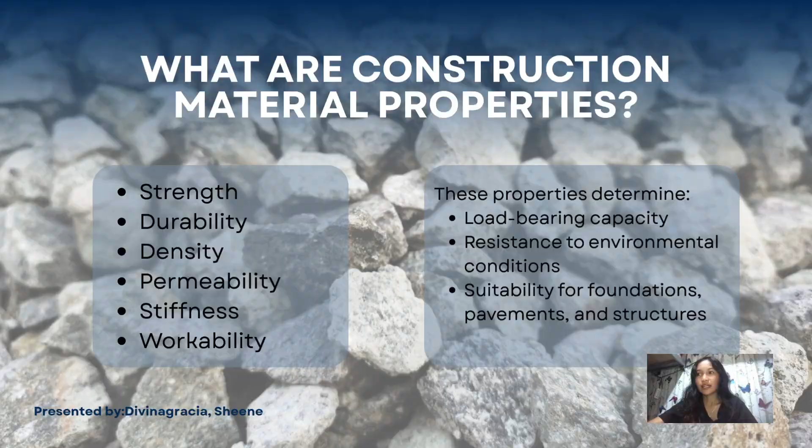And next, let's talk about the types of construction aggregates.

Next we have the concrete aggregates. This includes the sand, gravel, or crushed stone, and their primary job is to be a filler in our concrete, as it also helps with the compressive strength of our concrete.

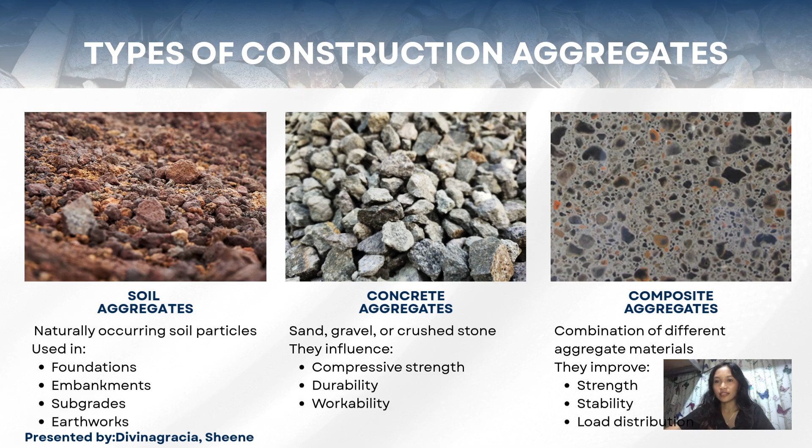And lastly, we have composite aggregates. As the name suggests, these are a combination of different aggregate materials. It's like a custom blend. They do this to improve the overall strength and stability of the mix, and to ensure better load distribution.

Next, where do our aggregates come from? First, there are three main types of rocks. Geologists call them igneous rocks, sedimentary rocks, and metamorphic rocks. Igneous rocks form from cooled and solidified magma or lava. Because of this, igneous rocks are often very hard, strong, and durable, making them excellent for crushed stone aggregates.

Next, we have sedimentary rocks. These are formed from deposited sediments over time. Examples are sandstone, shale, and limestone. These rocks can sometimes be layered or bedded, which can affect their strength.

And lastly, we have the metamorphic rocks. These form when existing rocks - igneous rocks and sedimentary rocks - are put under intense heat or pressure. For example, limestone, when put under heat and pressure, becomes a beautiful crystalline marble. So the first step is to understand the aggregates' properties so we can understand the next topics.

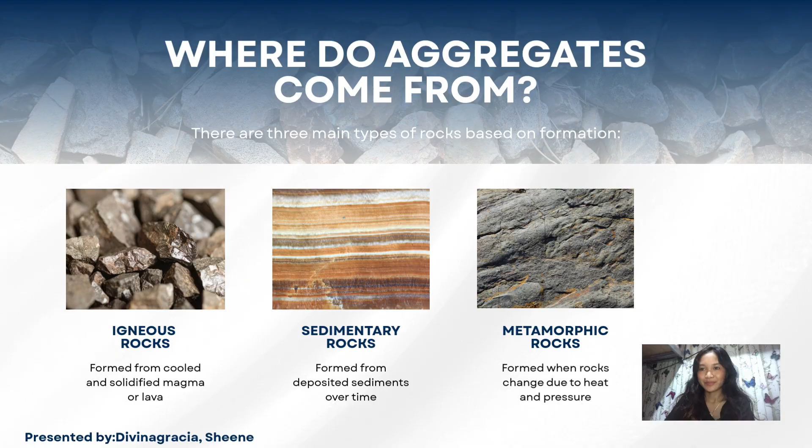Hello everyone. So now let's talk about soil. By definition, soil is a loose mixture of organic and inorganic materials. The organic part comes from decomposed microorganisms and plant debris, while the inorganic part consists of rocks and minerals that have been broken down by weathering and other natural processes.

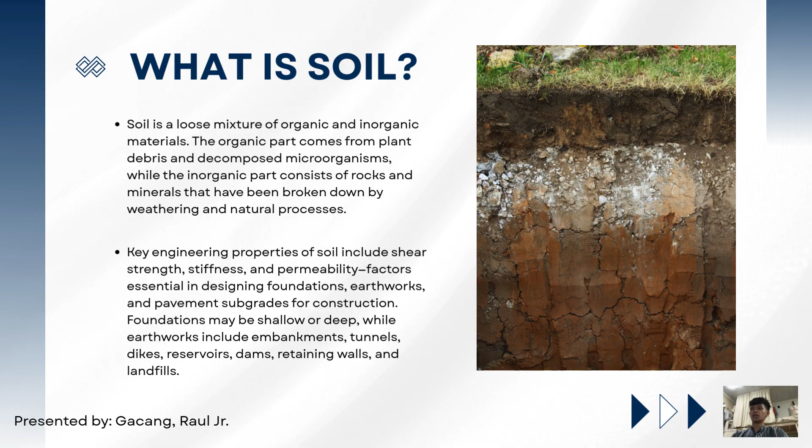Nakadepende siya sa stiffness, permeability, and sa iyang shear strength, whether shallow siya nga foundation or deep foundation. So, unsa man gid ang naa sa isa ka soil or soil sample?

So, first is the solid phase, which is ang soil particle mismo or the soil itself. Mao ni siya ang mineral or rock fragments that form the framework of the soil, and diri gikan ang strength and structure sa soil. Second is the liquid phase.

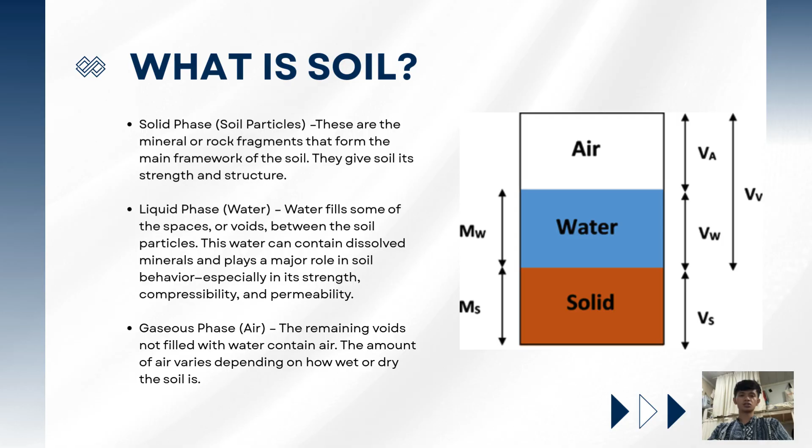So the third one is the gaseous phase or ang air, which is also known as voids. Mao ni siya ang gaps mismo sa soil particles. Nagadepende ang amount sa gas sa water content sa soil. So kung mas dry ang soil, mas daghan siya gas or voids.

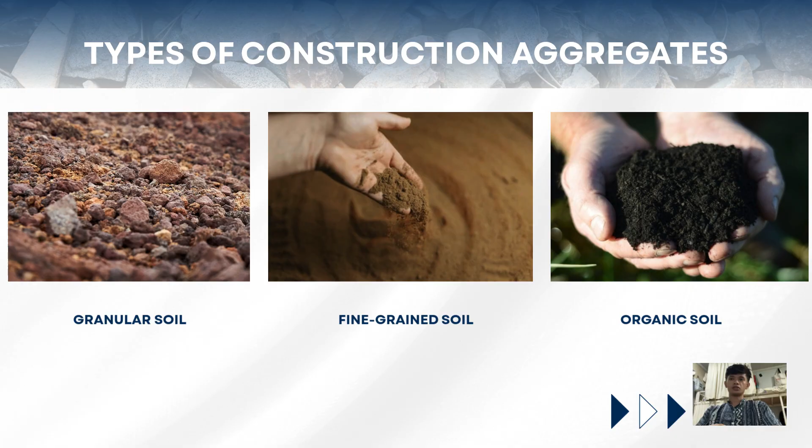So there are three types of aggregates. First is the coarse aggregates or ang granular soil. Next is the fine grain soil, and third is the organic soil. First is the granular soil. Under ASTM D2487, ang granular soil is ang soil na more than 50% ang ma-retain sa sieve number 200. Meaning, dagko ang iyang size na mao ni ang reason nganong di siya makalapas sa sieve number 200.

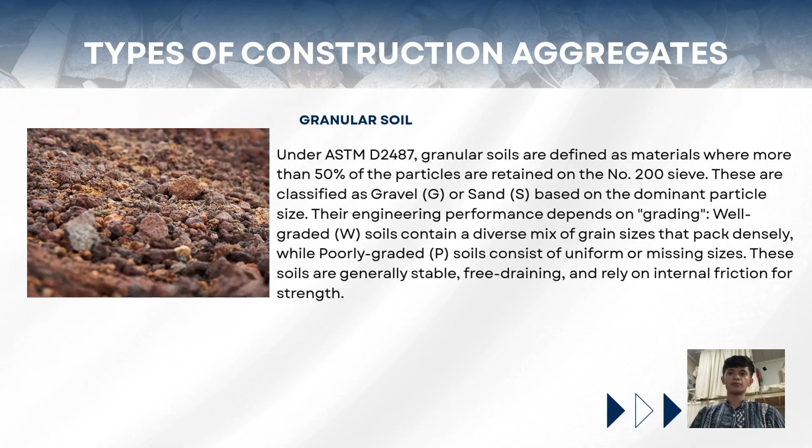So, ginaklasify ni siya ang granular soil aggregate into two categories, which are gravel and sand, based on the dominant particle size. Second is the fine aggregate or the fine grain soil. Mao ni siya ang soil particles na more than 50% ang mupas through number 200 sieve. It is categorized as silt and clay. ASTM distinguishes them using Atterberg limit to determine plasticity, which is very important and we are very much familiar with since nag-take ta og soil mechanics last semester.

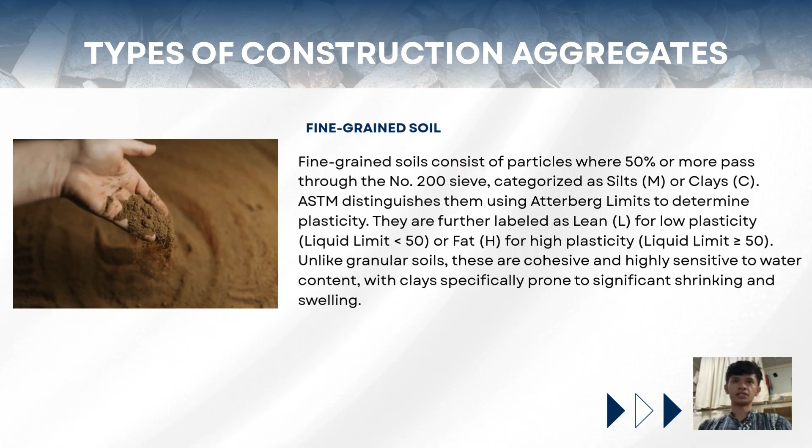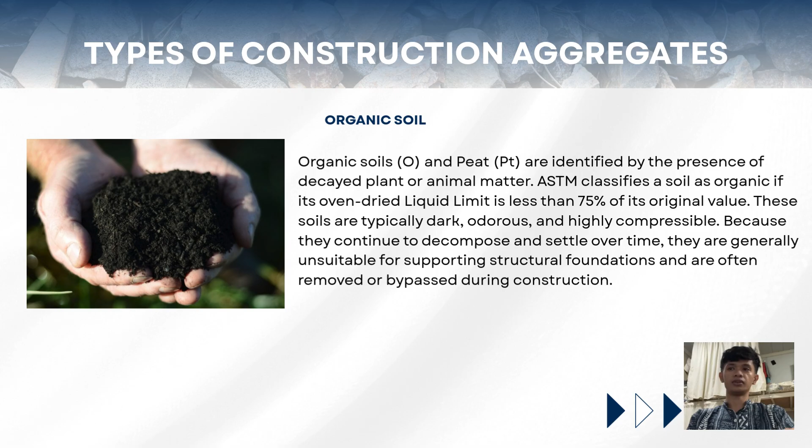Last is the organic soil. From the name itself, it is a soil identified by the presence of decayed plants or animal matter. ASTM classifies a soil as organic material if its oven-dried liquid limit is less than 75%. Most organic material is typically dark and has odor, and is highly compressible, which is not ideal para buhatan og foundation or project above it kay dili niya makaya og support ang isa ka structure.

So let's talk about the engineering properties. First is the granular soil or the coarse grain soil. It is high in shear strength, which is derived from internal friction and particle interlocking. High permeability, low compressibility, and non-cohesive, meaning it does not stick together. It is prone to erosion or collapse in vertical cuts.

Next is the fine grain soils. Low permeability, high cohesion, meaning particles stick together, allowing for molded shapes and steeper temporary slopes. Consolidation: subject to slow long-term settlement as water is squeezed out over the years. Volume change: high plasticity clay shrinks significantly when dry and swells when wet, risking foundation damage.

Last is the organic soil, which has extreme compressibility, low shear strength, and secondary compression. It continues to settle indefinitely as organic matter decomposes. So meaning dili siya stable. And it has high water content, often holding a massive amount of water relative to its solid weight.

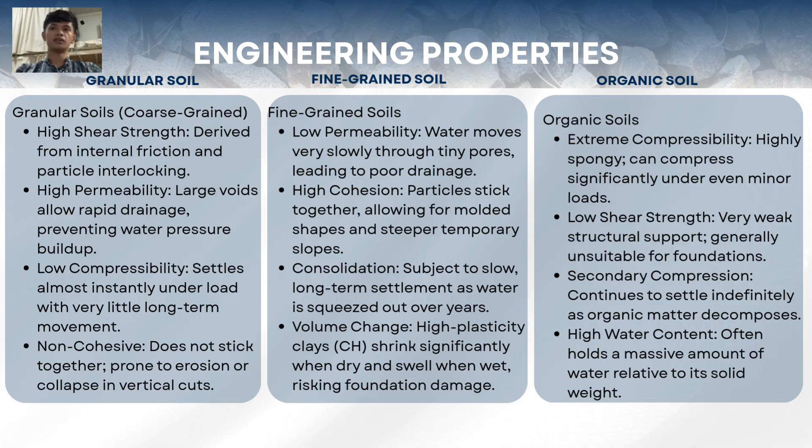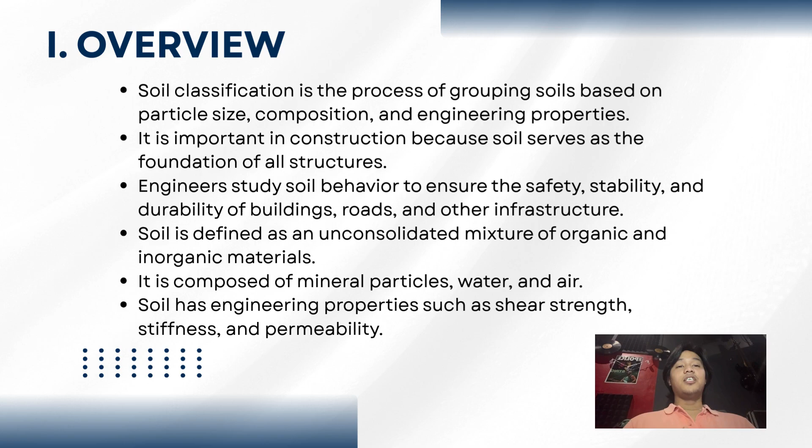Good morning. Mag-proceed ta sa topic sa soil classification. Ang soil classification kay ang process of grouping soils based on size, composition, o engineering properties. Importante siya sa construction. Ang soil serves as the foundation of all structures. Also, engineers study soil behavior to ensure safety and stability.

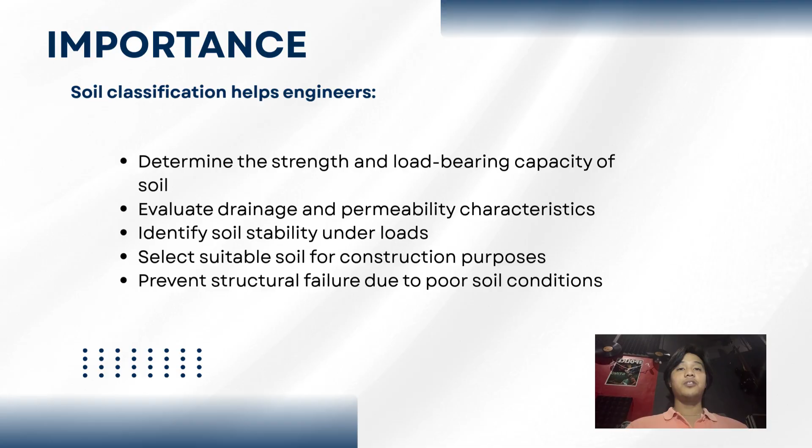Sa soil classification, ang iyang importance kay ma-determine nato ang strength and load-bearing capacity sa soil, ma-evaluate nato ang drainage and permeability characteristics, ma-identify nato ang soil stability under loads, ma-prevent nato ang structural failure due to poor soil conditions. Nganong mag-matter ang particle size? Mag-matter siya sa strength, drainage, ug stability.

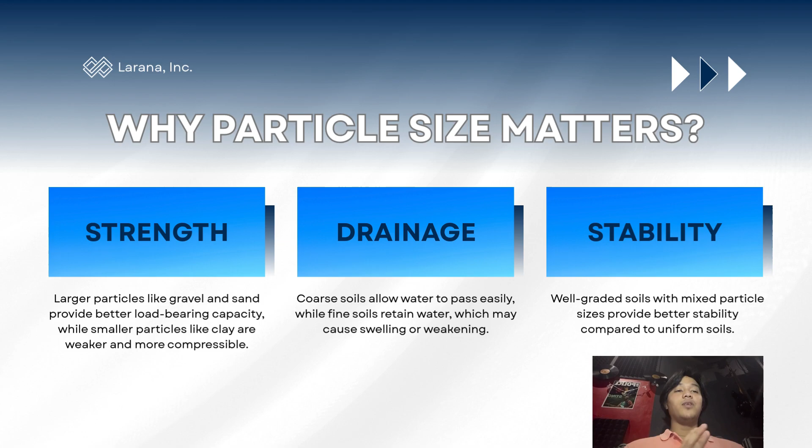Strength: larger particles like gravel and sand provide better load-bearing capacity, while smaller particles like clay are weaker and more compressible. Sa drainage naman, coarse soils allow water to pass easily, while fine soils retain water, which may cause swelling or weakening. Ang clay mag-retain og water. Sa coarse soil naman, dali na siya kay dagko ang voids, so paspas ang travel. Stability: well-graded soils with mixed particle sizes provide better stability compared to uniform soils.

Asa ma-apply ang soil classification? Ma-apply nato siya kay ang soil essential siya sa construction, sa foundation, including both shallow and deep foundations, as it supports the structural load. It is also important in pavements and road constructions, where soil provides the base and affects durability and performance. And in addition, soil plays a key role in embankments and earthworks, which are used to create stable ground elevations.

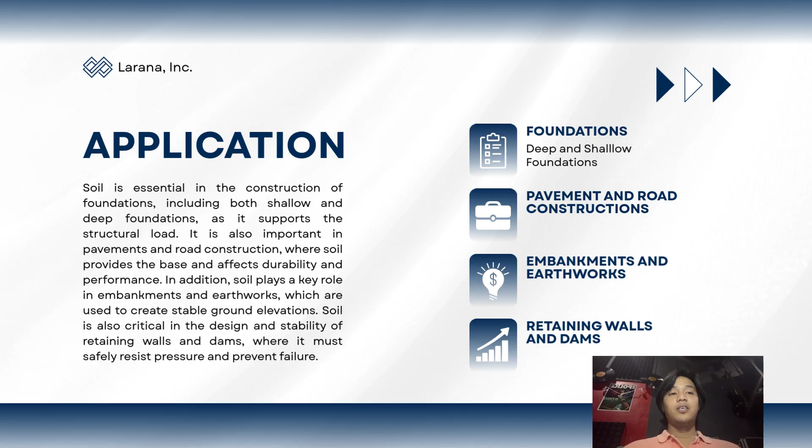Soil is also critical in the design and stability of retaining walls and dams, where it must safely resist pressure and prevent failure. Now, karon ito na application niya sa foundation, sa pavement and road construction, embankments, and earthworks, tapos sa retaining walls and dams.

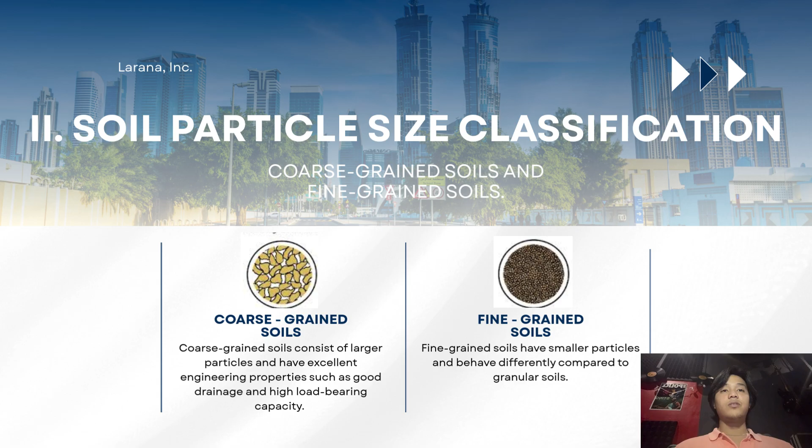Sunod sa soil particle size classification, na-mention naman ganina ang coarse o yung fine grain soils. Ang coarse grain soils consists of larger particles, have excellent engineering properties, such as good drainage and high load-bearing capacity. Sa fine grain soils naman, mga smaller particles and behave differently compared to granular soils. Dapat ta mag-classify kung coarse grain siya or fine grain.

Una, sa coarse grain, sa gravel, particle size niya kay larger than 2 mm, mao ni matawag nga gravel. Also, mga particles pass through 75 mm sieve, ma-retain sa 2 mm sieve. Kabalo na mo sa sieve, kay naagi naman ta sa geotech. Also, ang gravel kay mostly found in riverbeds. Ang iyang properties kay excellent load-bearing capacity, good drainage, low compressibility.

Sa sand naman, ang iyang size kay 0.075 mm to 2 mm. Naa tay duha ka klaseng types of sand, coarse sand ug fine sand. Ang coarse sand, ang iyang particle size kay 0.425 mm to 2 mm. Sa fine sand naman, 0.075 mm to 0.425 mm. Ang iyang properties kay good strength, good drainage, suitable for foundations and pavement layers.

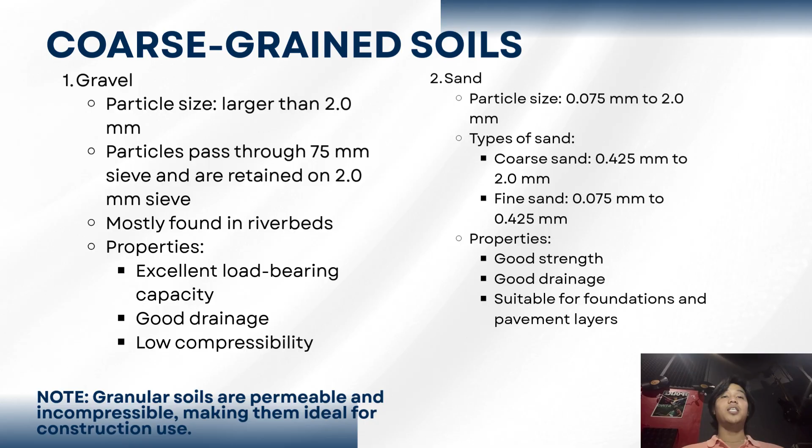Also, note, dili nato kalimtan na ang granular soils are permeable and incompressible, making them ideal for construction use. Timan-i ni. Sa fine grain soils naman, naa ta si silt. Ang iyang size, para matawag na siya nga silt, kay 0.002 mm to 0.075 mm. Mga particles nga dili nato makita sa atong mga mata.

Ang iyang properties: low strength when wet, kay dali ra siya mo-settle. Moderate compressibility, tas poor drainage, kay grabe ka fine, maglisod og agi ang tubig. Sa clay naman, ang iyang size kay less than 0.002 mm. Mao ni atong pinaka very fine particles. Ang iyang properties kay plastic and cohesive, high compressibility, poor drainage, can expand and shrink with moisture changes.

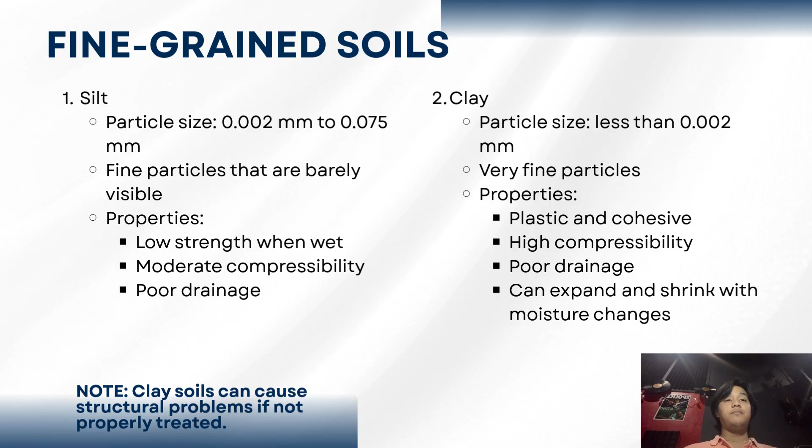Note, clay soils can cause structural problems if not properly treated. Particle size analysis is a laboratory test used to determine the distribution of soil particle sizes. Purpose niya kay ma-determine nato ang particle size distribution, ma-classify nato ang soil according to standard system, identify soil strength and drainage characteristics. Particle size analysis includes sieve analysis and hydrometer tests.

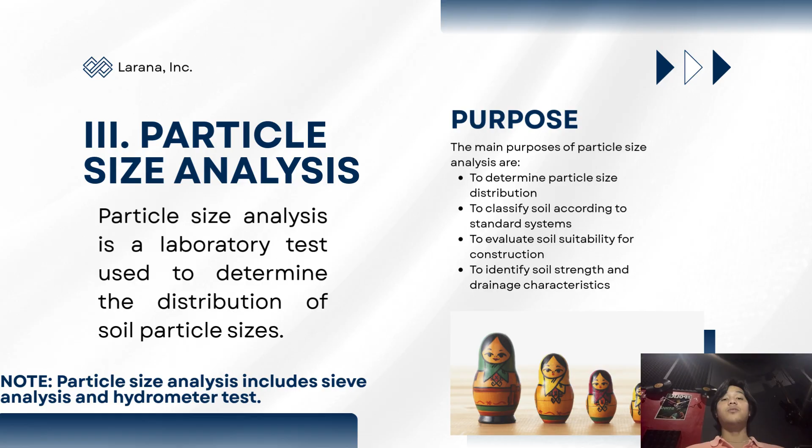Makita nato dito sa table, sieve analysis. Ito yung mga sieve number diri. Sieve number, selected borrow, grading A. The sieve analysis is used to determine the particle size distribution of coarse grain soils, gravel and sand. Importante ang sieve analysis kay sa atong sand, sa atong clay nga grabe kagamay iyang particle size, 0.00 something, lisod na siya sukdon gamit ruler. So mao na ang sieve analysis, diri nato ma-determine kung clay na ba siya.

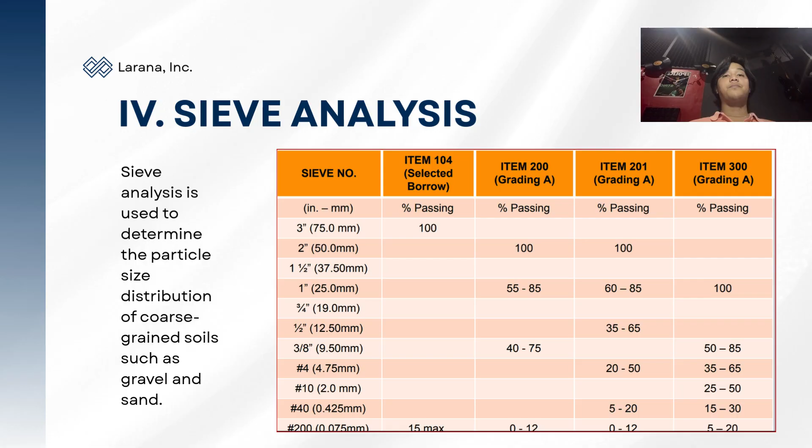So ang table dito sa sieve analysis, usually ginagamit nga sieve kay number 4, number 10, number 40, number 200. Sa atong sieve analysis naa tay procedure. Una buhaton, dry the soil sample. Before ana, syempre magkuha ta og soil sample, mag-soil sampling ta gamit ang soil sampler nga equipment. Tapos i-dry nato ang soil.

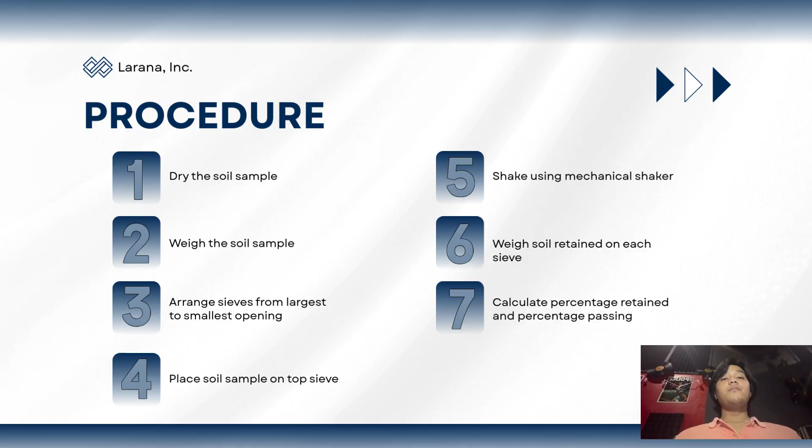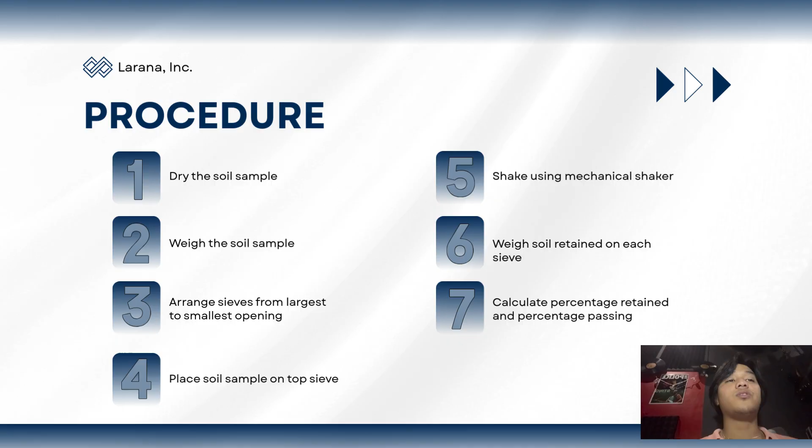I-weigh nato ang soil sample. Then i-arrange nato ang sieve from largest to smallest, ipatong-patong, ang pinakataas kay ang pinakadako. Dayon, i-place nato ang soil sample on top sieve. I-shake nato using mechanical shaker or mano-mano. Sa geotech ninyo, mano-mano ra man to. I-shake nato, ang timer dayon. Sunod nga procedure kay i-weigh nato ang soil retained on each sieve. Ma-calculate nato ang percentage retained and percentage passing.

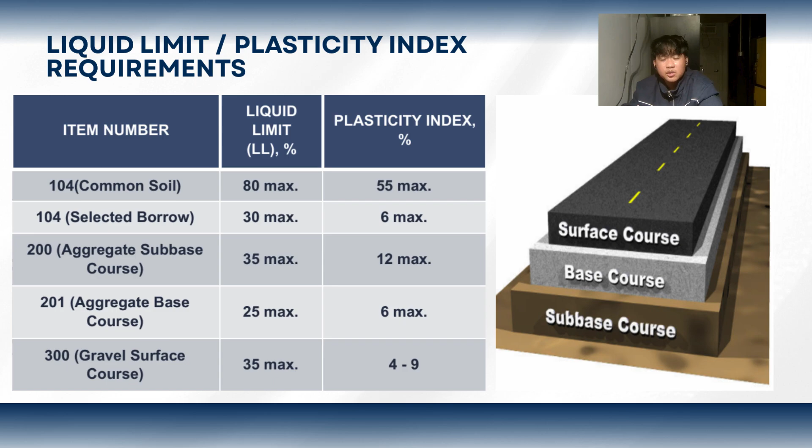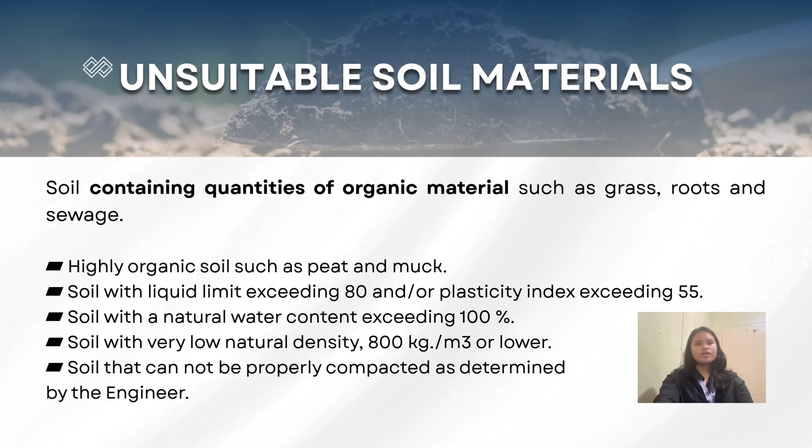So, what are unsuitable soil materials? Unsuitable soil materials are soil containing quantities of organic material such as grass, roots, and sewage. These soil materials are highly organic, such as peat and muck. This soil also has a liquid limit exceeding 80 and/or plasticity index exceeding 55. Also, it has a natural water content exceeding 100% and very low natural density of 800 kilograms per cubic meter or lower. These types of soil cannot properly be compacted as determined by the engineer.

So, the common unsuitable soils include organic soils, peat, highly plastic clays, silts with poor drainage, expansive soils, and loose saturated sands. These unsuitable soil materials also exhibit low shear strength but high compressibility, excessive moisture retention, and poor drainage characteristics. These characteristics may cause settlement, instability, or structural failure.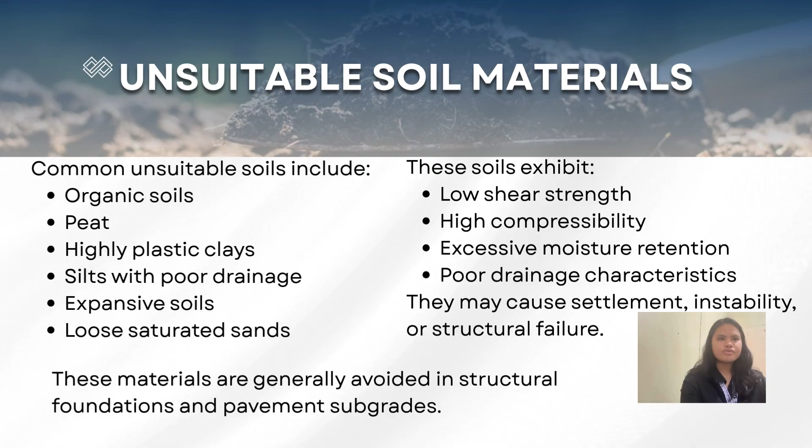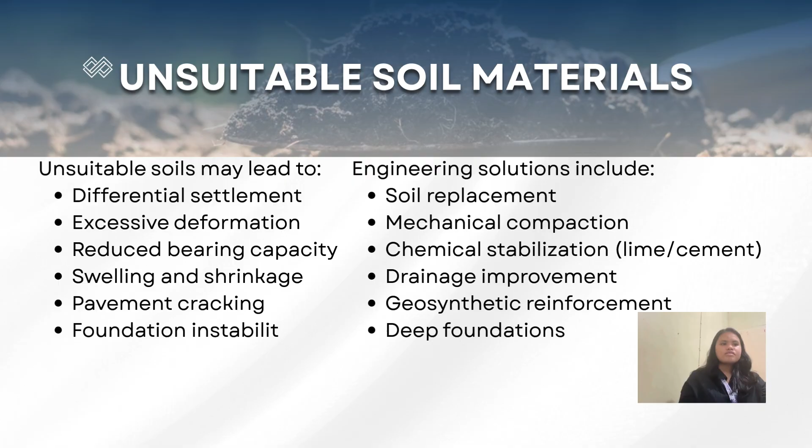These unsuitable soil materials are generally avoided in structural foundations and pavement subgrades for various reasons. Unsuitable soil materials may lead to differential settlement, excessive deformation, reduced bearing capacity, swelling and shrinkage, pavement cracking, and foundation instability. So you could use some engineering solutions to solve these problems, including soil replacement, mechanical compaction, chemical stabilization with lime or cement, drainage improvement, geosynthetic reinforcement, and deep foundations.

So let us now proceed to soil classification using the AASHTO classification system. We have here the table for the AASHTO classification system. We have groups A-1 to A-7 and then A-8 for organic materials. For your group index computation and classification, here is the general guidance. So first, the AASHTO soil classification system has 8 major groups, from A-1 to A-7 with several subgroups, and then organic soils at A-8.

The required tests for these types of soils are sieve analysis and Atterberg limits. The group index is an empirical formula used to further evaluate soils within a group or a subgroup. So we have here A1 to A3 are granular soils, which have percent passing the sieve number 200 less than 35%. A4 to A7 are silt and clay materials, which have percent passing sieve number 200 greater than

36%. So for A1 to A3, using LL and PI separates silty materials from clay materials, but this is only applicable for the A2 group and its subgroup. For A4 to A7, using LL and PI separates silty materials from clay materials. So the original purpose of this classification system is for road construction or your subgrade rating.

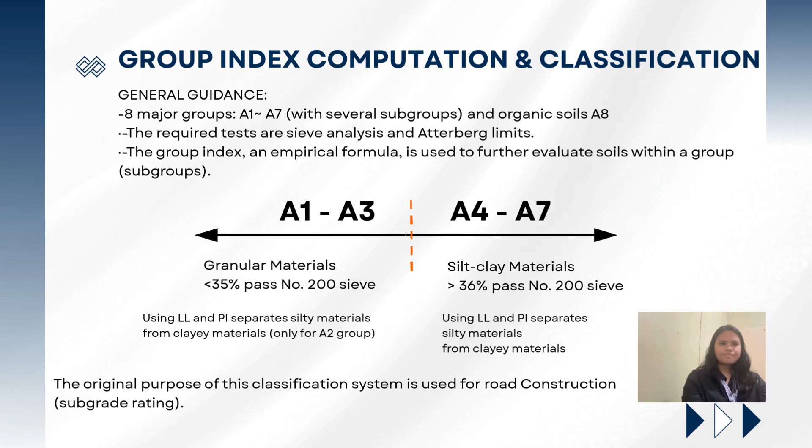Here we have the group index computation formula. GI, or your group index, is equal to (F200 minus 35) times [0.2 plus 0.005 times (LL minus 40)], plus 0.01 times (F200 minus 15) times (PI minus 10).

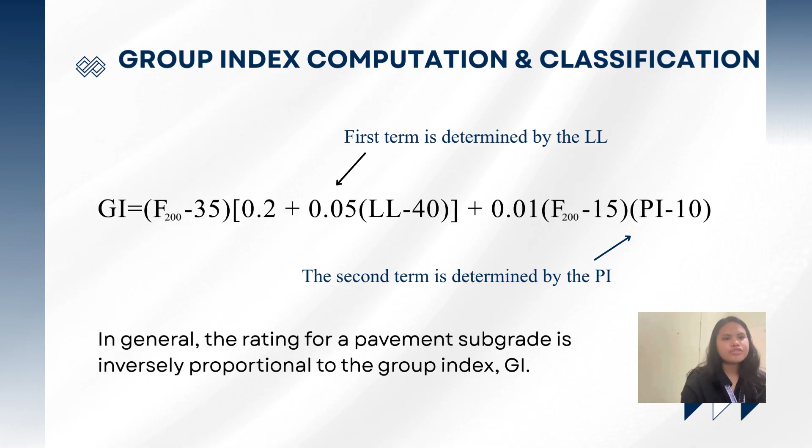So the first term is determined by your LL, and the second term is determined by your PI, or your plasticity index. In general, the rating for pavement subgrade is inversely proportional to the group index, or your GI. So without further ado, let us move on to an example for your group index computation. So we have here example number 1.

95% of soil passes through the number 200 sieve and has a liquid limit of 60 and a plasticity index of 40. So, we will be classifying this soil according to the AASHTO system.

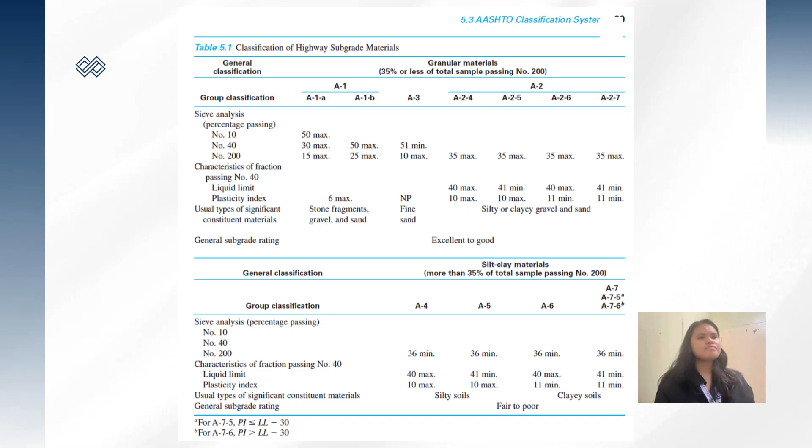And then moving on to the application and importance of soil classification in construction. These are used for foundation design, for determining your bearing capacity. It predicts settlement behavior and identifies compressibility and shear strength. Soil classification is also the foundation of geotechnical design. It reduces structural risk, improves safety and cost efficiency.

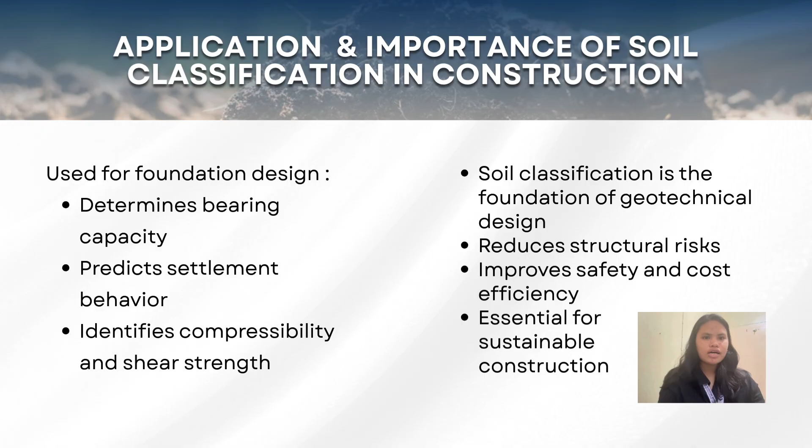So, that would be all.

Thank you. So, let us talk about the compaction test of soil based on AASHTO T99 or T180 and ASTM D698 or D1557. So, what is soil compaction?

It is a process of increasing soil density and removing air, usually by mechanical means. It is achieved using rollers, rammers, etc. It is essential for earthworks and foundation stability, and to compute for density, we use this formula: rho, or density, is equal to mass over volume.

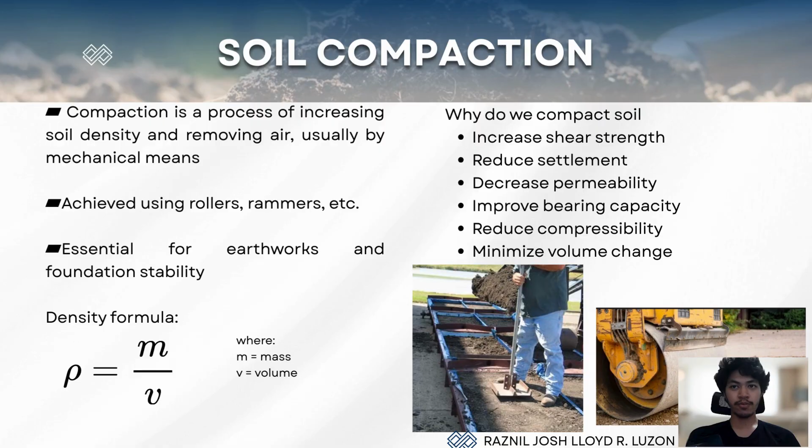So why do we compact soil? We compact soil for purposes such as increasing shear strength, reducing settlement, decreasing permeability, improving bearing capacity, reducing compressibility, and minimizing volume change.

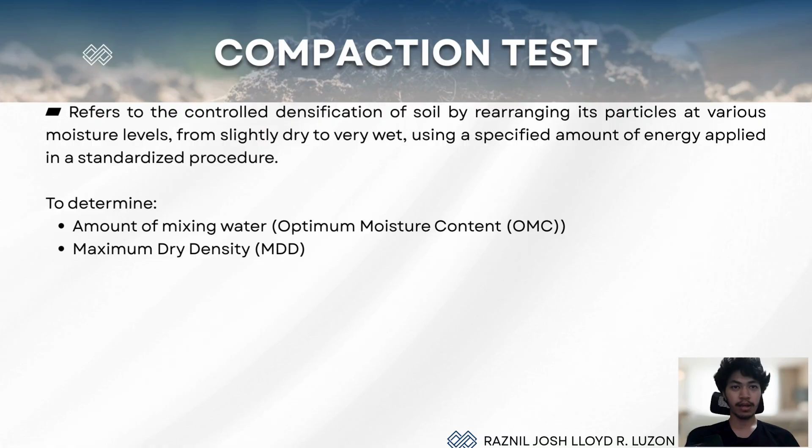Now, what is a compaction test? It refers to the controlled densification of soil by rearranging its particles at various moisture levels, from slightly dry to very wet, using a specified amount of energy applied in a standardized procedure. It is used to determine the amount of mixing water, or optimum moisture content (OMC), and maximum dry density (MDD).

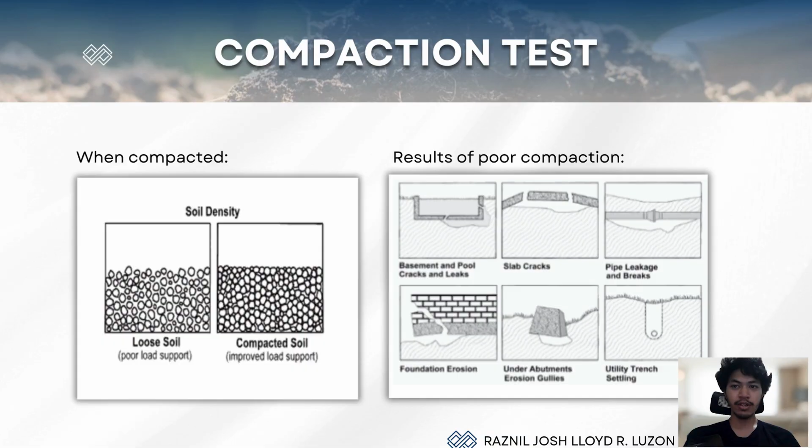So, the compaction test is essential because when soil is not compacted properly, it offers poor load support as seen here, while compacted soil improves load support. Results of poor compaction may be basement and pool cracks and leaks, slab cracks, pipe leakage and breaks, foundation erosion, erosion gullies under abutments, and utility trench settling.

And what is moisture compared to soil density? Moisture content of the soil is vital to proper compaction. Moisture acts as a lubricant within soil, sliding the particles together, while too little moisture means inadequate compaction and the particles can't move past each other to achieve density. But too much moisture leaves water-filled voids and subsequently weakens the load-bearing ability.

The highest density for most soils is at a certain water content for a given compaction effort. The drier the soil, the more resistant it is to compaction. In a water-saturated state, the voids between particles are partially filled with water, creating an apparent cohesion that binds them together. This cohesion increases as the particle size decreases.

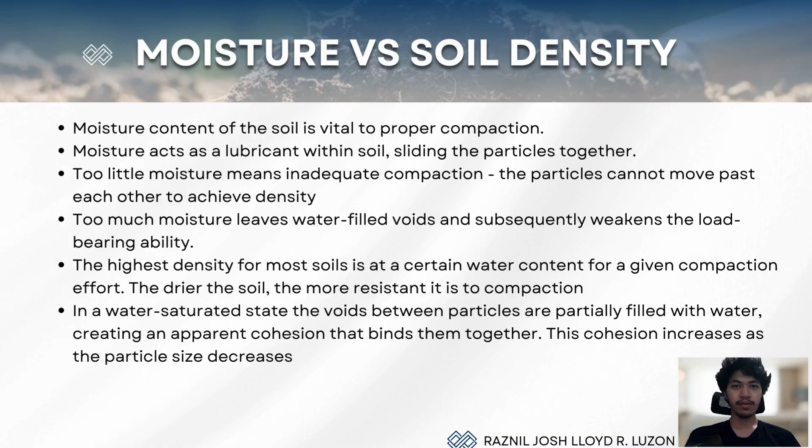So let us go back to what the compaction test is, as discussed earlier. For its procedure, first we prepare a representative soil sample. Second, add a known amount of water to the dry soil sample to achieve a target moisture content. Third, we compact the soil in the mold in 3 equal layers. Fourth, roughen the surface between layers to ensure proper bonding between the soil particles.

Fifth, we remove the soil from the mold, take our representative sample, and dry it in an oven to determine the exact moisture content and dry density. Sixth, we repeat the steps at least 4 to 5 times with increasing amounts of water to establish a proper compaction curve. And last, we plot the curve to determine OMC and MDD.

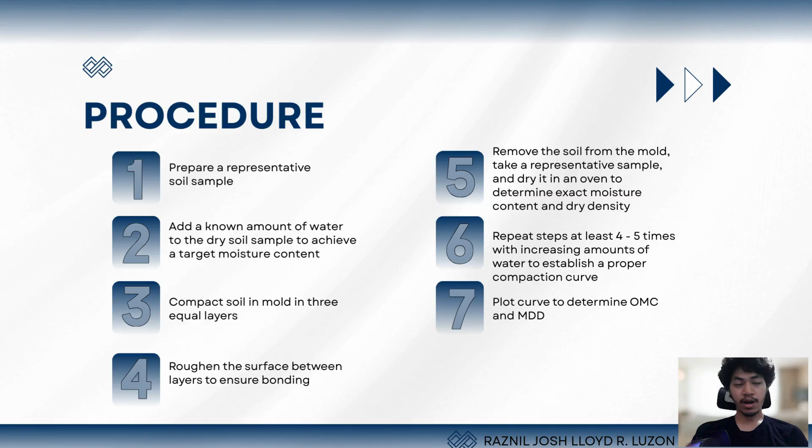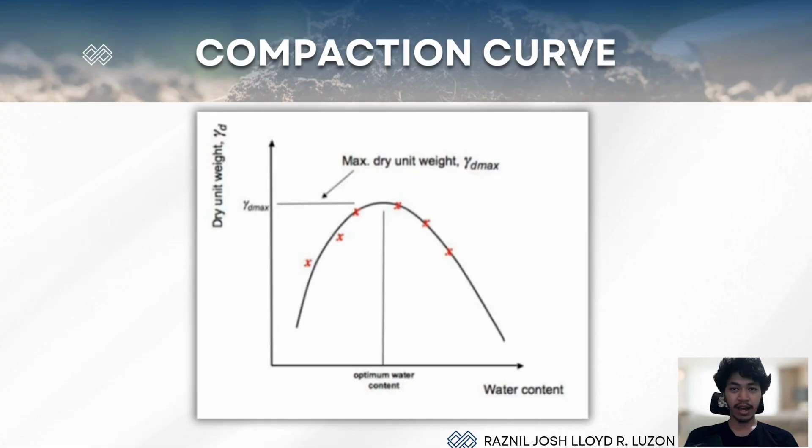Good day, everyone. I will be discussing the California bearing ratio, or what we commonly call the CBR test, under its equivalent AASHTO standard T193.

So, unsa man gid niya ang CBR? The California bearing ratio is a method of evaluating the relative quality of subgrade, subbase, and base soil for pavements.

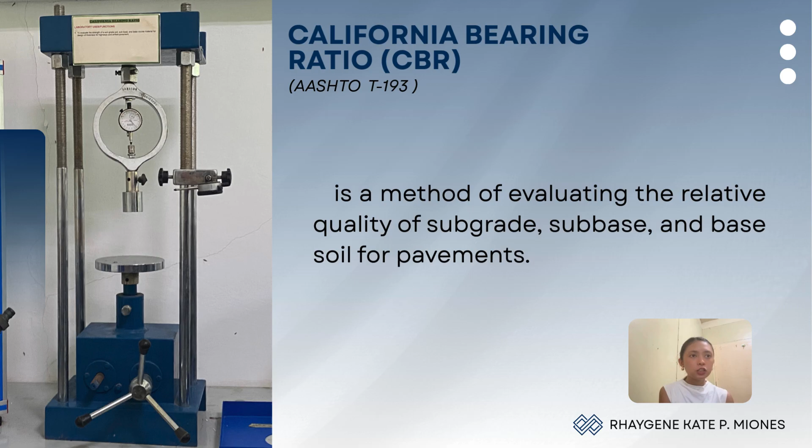Now, let us look at how we compute the CBR. The formula is CBR equals test unit stress divided by standard unit stress, multiplied by 100.

Basically, we compare the stress value obtained from our soil sample against a standard stress value. The stress values are given in AASHTO T193. At every 0.1 inch penetration, the standard stress is 1,000 PSI or 6.89 megapascal. At 0.2 inch penetration, the standard stress is 1,500 PSI or 10.34 megapascal.

This indicates that the higher the CBR value, the better the quality of the soil. This test is very important in pavement design.

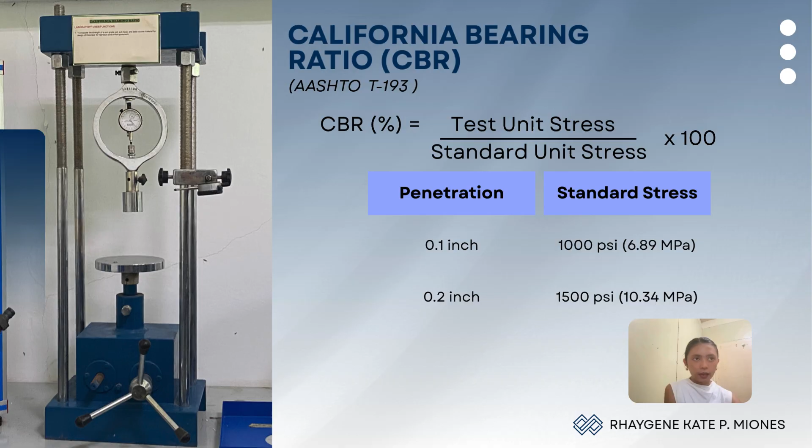The CBR test follows 3 main steps. Step 1 is compaction, where the soil sample is compacted using 65 blows per layer. This simulates the actual field conditions of our soil.

Step 2 is soaking. After compaction, the sample is soaked in water for 4 days. This is important because it simulates the worst case scenario, where the soil is saturated with water like during the rainy season.

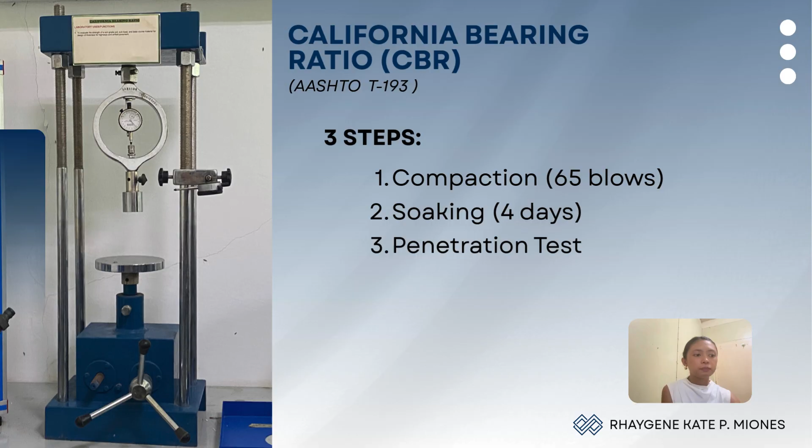Step 3 is the penetration test. After soaking, the actual CBR test is performed by penetrating the soil sample with a piston and measuring the resistance. For the soaking phase, we use a water tank.

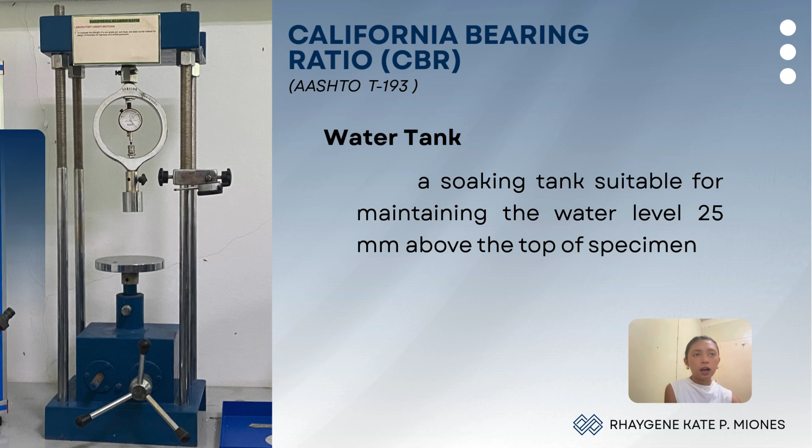Specifically, a soaking tank that maintains the water level at 25 mm above the top of the specimen. It's very important to maintain this water level to ensure that our sample is fully saturated throughout the entire soaking period.

After soaking, the sample is placed under the CBR loading device. This is a compression type apparatus that is capable of applying a uniform increasing load at a rate of 1.3 mm per minute. This device applies the load to our soil sample during the penetration test and records the resistance.

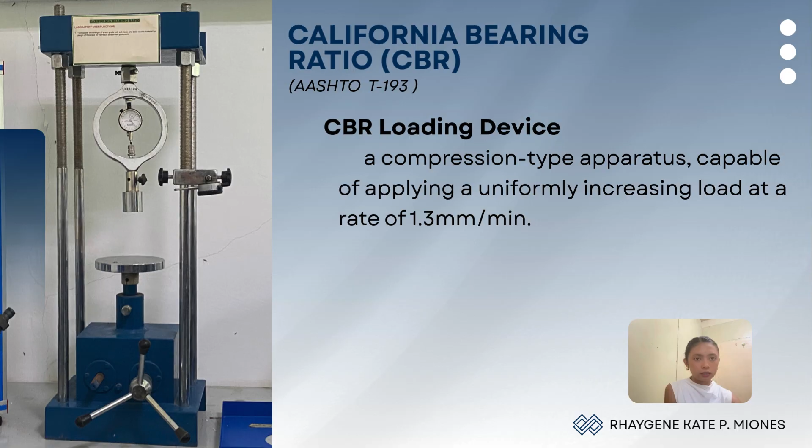The load is applied through what we call the penetration piston. This is a metal of circular cross-section with a diameter of 49.63 mm, giving it an area of 1,935 mm squared, and it must be at least 102 mm long. This piston penetrates the soil sample to measure the bearing capacity of our soil.

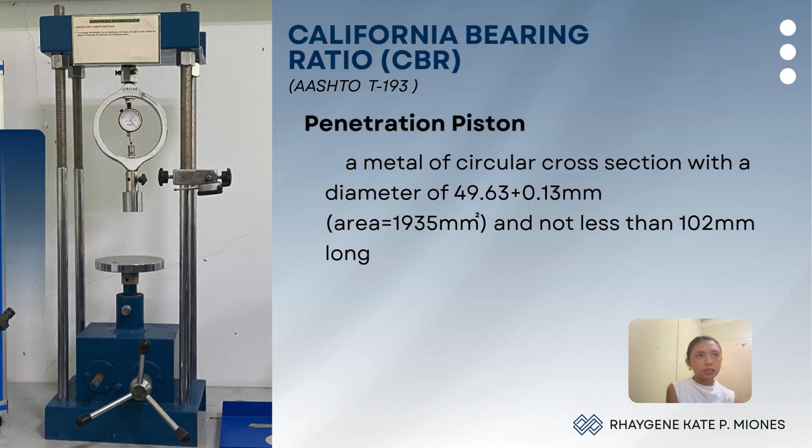Now, we can't just test CBR arbitrarily. There are required minimum CBR values depending on the type of aggregate layer. For item number 200, aggregate sub-base, the minimum is 30% CBR value.

For item 201, aggregate base, the minimum is 80%. Also for item 202, crushed aggregate base, the minimum is 80%. And for item 300, gravel surface course, the minimum is 80%.

As you can see, the base course and surface material require higher CBR values compared to the sub-base. This is because the higher the layer, the more load it directly carries from, for example, traffic on roads.

So to summarize, the California Bearing Ratio Test is a very essential test in road and pavement construction. It tells us whether our soil is strong enough to carry the loads that will be placed above it. Without this test, we cannot ensure the quality and safety of our roads and pavements.

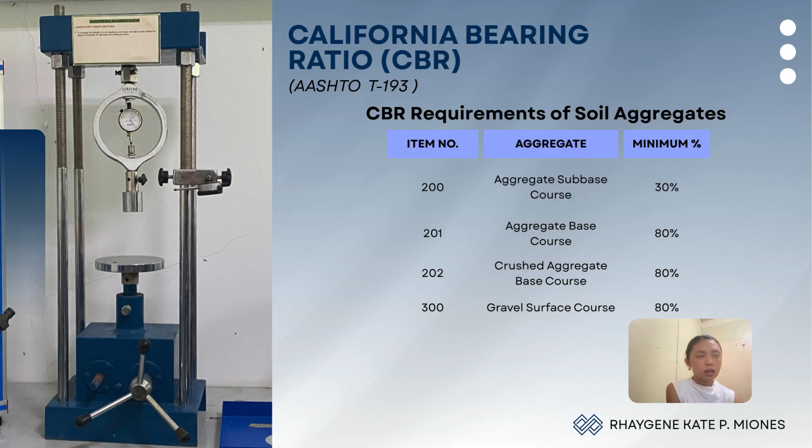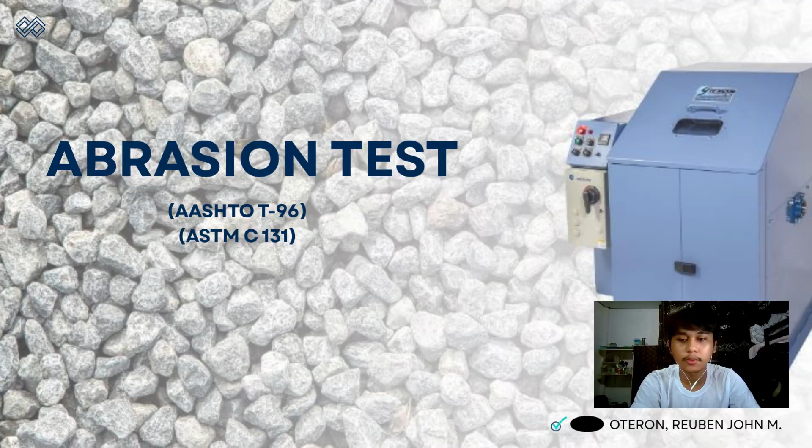Good day, everyone. In this topic of Unit 2, we will be talking about the abrasion test and its applications to construction materials.

The abrasion test evaluates the structural strength of coarse aggregate. It gives an indication of quality as determined by resistance of impact and wear. This test essentially gives us the resistance or strength of our coarse aggregates when the aggregates are subjected to erosion or weathering.

To simulate this in a laboratory, we use the abrasion test, mostly using the Los Angeles abrasion test apparatus, so that we can replicate what will happen to our coarse aggregates in a real world scenario, so that we can compensate our concrete ratio and know the properties and strength of our concrete mixture before pouring.

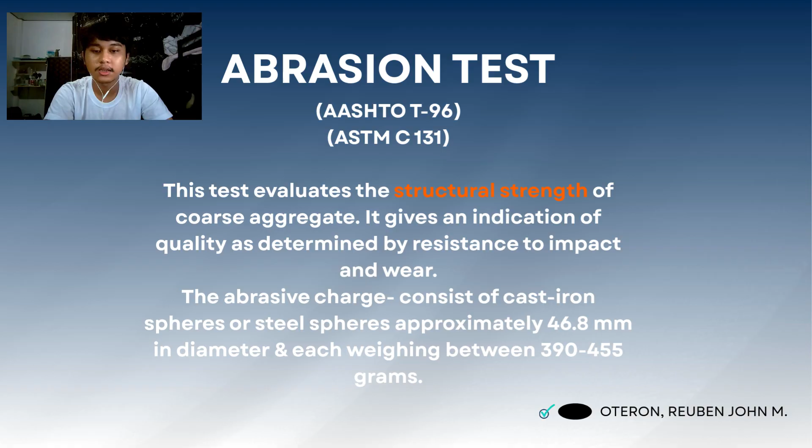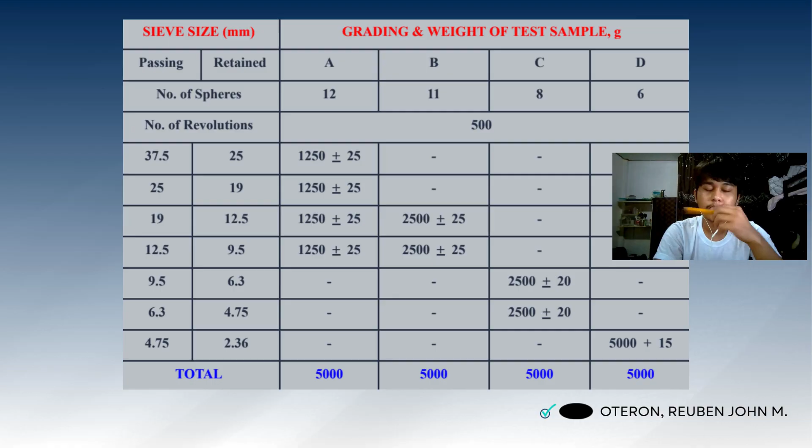The Los Angeles abrasion test apparatus is just like a cylindrical rotating mechanism that is subjected to rotation, where a certain number of spheres along with the aggregate will continue to rotate like a blender so that the aggregate starts to break down.

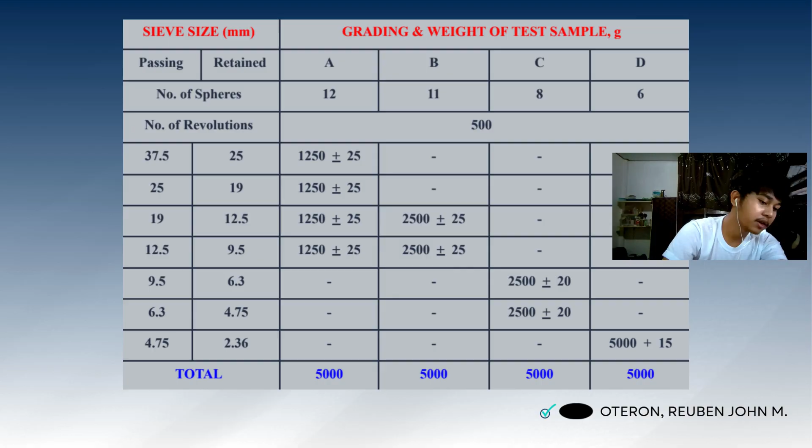Also in our abrasion test, instead of using a different number of spheres during the test, we can also change the composition of the spheres, like using copper, lead, or steel.

Mostly steel spheres are used in the laboratory activity, and since metals have different densities, there will be different results. In our case, we will be using steel spheres with weights up to 5,000 grams plus or minus 25 grams, or 5 kilos, for 12 spheres. For 11 spheres it would be 4,584 grams. For 8 spheres, we will be using 3,330 grams of steel. And for the least number of spheres, which is 6, we'll be using 2,500 grams or 2.5 kilos.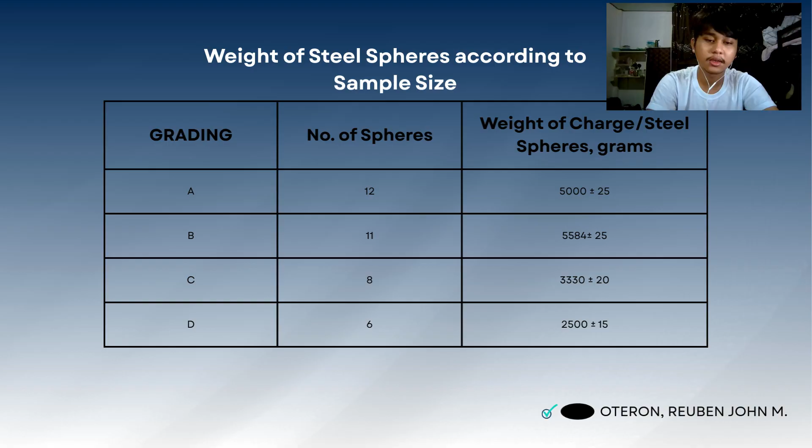So there are three procedures on how to do the abrasion test. First, place the test sample and abrasive charge in the Los Angeles test machine, rotated at a speed of 30 to 33 revolutions per minute, for a minimum of 500 revolutions. Second, at completion of the test, discharge material from the machine and sieve the finer portion on the 1.7 millimeter sieve using the standard procedure of sieving aggregates. Third, wash all materials coarser than 1.7 millimeters, dry to constant weight in the oven at 105 to 110 degrees Celsius, and weigh to the nearest 1 gram.

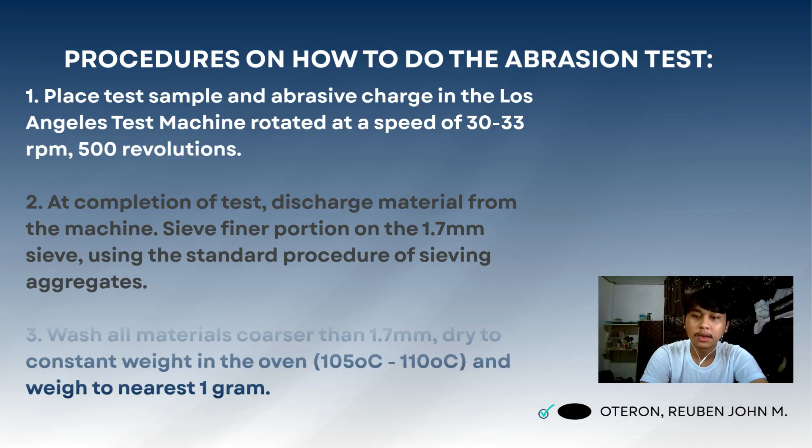Once the abrasion test is done, we can compute the abrasion loss. The abrasion loss is basically the loss of weight or mass of our aggregate due to erosion during the test. We can calculate it using the abrasion loss formula: abrasion loss in percentage is equal to the original weight of sample minus the weight of sample retained at 1.7 millimeters in a number 12 sieve, times 100%, all over the original weight of the sample.

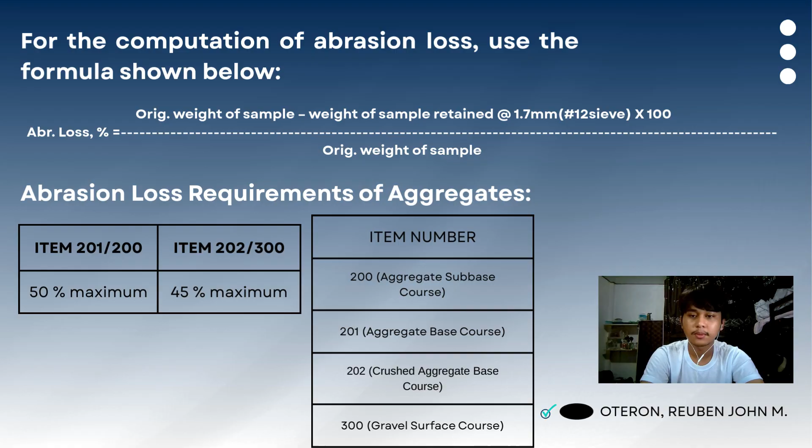So, other quality control measures for aggregates. Quality control for construction aggregates ensures concrete strength and durability through testing density, specific gravity, water absorption, and gradation or uniformity. Key tests like ASTM C127 and C128 establish particle density range, moisture absorption, and gradation, controlling for structural soundness, void space, and mix workability.

Quality control is very important to ensure that our concrete mixture is within the codes of the National Structural Code of the Philippines, so that we do not compromise the structural strength of the concrete by skipping these tests. These tests give us determination and assurance that our concrete is up to design and up to code, so that it will perform as designed.

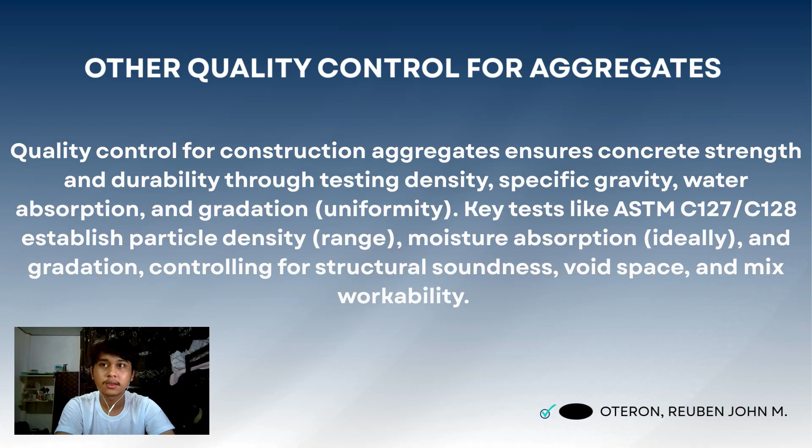So, key aggregate and quality control measures - we will be tackling five. First is specific gravity. Specific gravity measures the ratio of aggregate weight to water weight, indicating particle strength and quality. Most construction aggregates range from 2.5 to 3.0. Low values generally indicate weaker, more porous aggregates.

Specific gravity is just the ratio of the overall aggregate weight over the water weight, which is standard, since the density of water is 1,000 kilograms per cubic meter, or in terms of unit weight, 9.81 kilonewtons per cubic meter. Most construction aggregates range from 2.5 to 3.0, so this is very standard. In future subjects like Geotechnical Engineering and Soil Mechanics 1, we will encounter specific gravity a lot when calculating soil density, unit weight, or void ratios. Specific gravity, denoted as G, will be tackled quite a lot in the future.

Next is bulk density or unit weight. It defines the mass of aggregate needed to fill a container of a specified volume. It is essential for determining batch quantities and understanding the void content between particles, which affects cement paste requirements. Unit weight is actually just mass multiplied by the acceleration of gravity, which is 9.81 meters per second squared. So when you have a certain mass, you just multiply it by the acceleration due to gravity to get the unit weight, mostly expressed in kilonewtons per cubic meter. It is essential for determining batch quantities and understanding the void content.

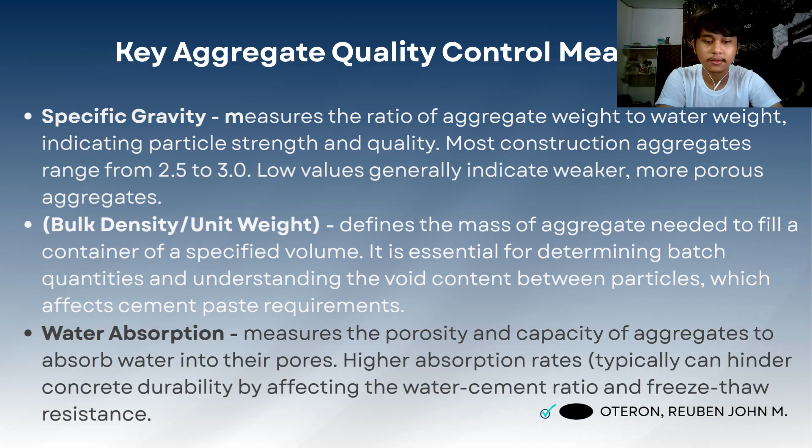Next is uniformity of aggregates, assessed via sieve analysis ASTM C136, to ensure a proper distribution of particle sizes. Uniformity affects the packing density, workability of concrete, and overall void volume.

When you are constructing high-rise buildings, this is very important - the uniformity of aggregates. Also in a small project, uniformity of aggregates is important.